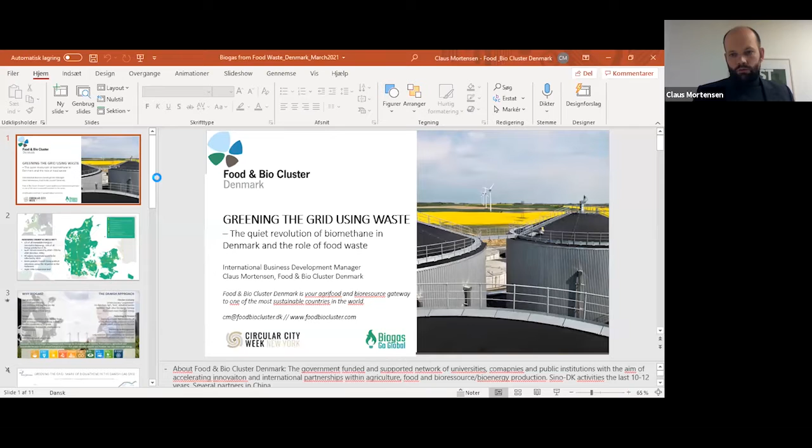Again, good morning, everyone. My name is Claus Mortensen. I'm a business developer in Food and Biocluster Denmark, which is the national cluster network within food and agriculture and bioresources. I've been working with biogas for the last around 9 to 10 years, and I'm here to basically tell the story about what has taken place the last 7 or 8 years in the Danish biogas sector.

This is a map of Denmark. We are in the northern part of Europe. We are highly intensive agricultural land. We produce three times the food that we consume, and we are highly dependent on having environmental solutions for this intensive and sustainable agricultural production.

So we are also well known for our climate policies. We have a clear climate goal of becoming climate neutral by 2050. That also involves using food waste as a resource for biogas and fertilizer. I'll of course get back to that.

I think one key aspect here is that we in Denmark have a tradition of working together and we have a high level of trust, which means that universities, companies, and policymakers are working closely together in this small country.

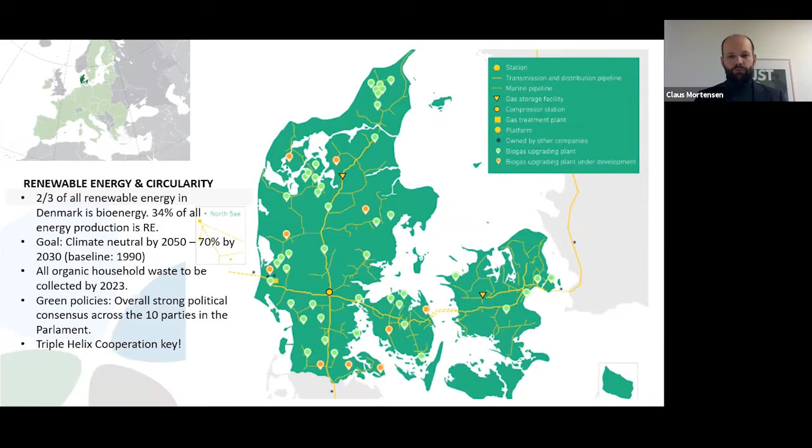So we are ourselves a gas producing nation. Many of you know this already, but I think biogas and biogas production solves a lot of different issues. It's not just an energy solution for producing renewable energy. It's also an agri-environmental solution for handling waste in different sectors.

So this is really a technology that has much more applications than just energy. I think that's a key thing I have to emphasize here.

And the Danish approach to that is that it is a circular economy. We're using waste. We're not using a high level of energy crops like you'll see in other European countries. And we see a high level of cooperation between different farmers, where we also have the contract between farmers and biogas plants, where you have this security of supply and also the security of getting rid of the digestate from the biogas plant.

But again, Denmark has chosen biogas production as a management strategy for organic waste streams from different sectors, because it plays on many of the different things we do in Denmark, also on agricultural, environment, and energy.

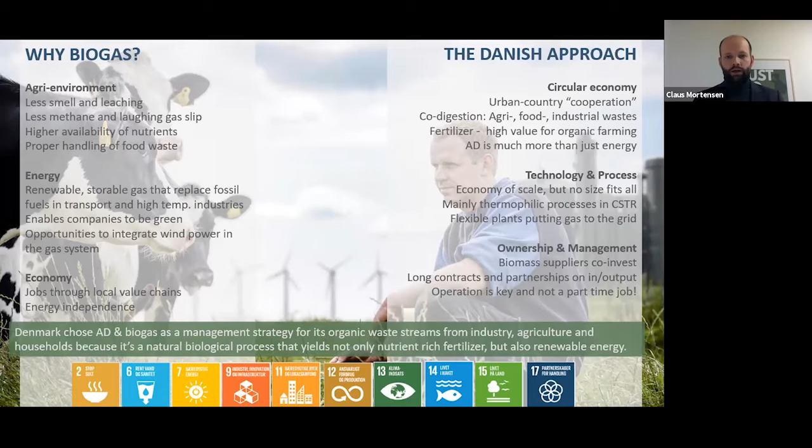So basically, we have around 170 biogas plants, and what we've seen the last 8-10 years is the rise of co-op plants. This means biogas plants hauling in 200,000 tons of biomass a year, and up to around, the biggest plants are close to 1 million tons.

As mentioned, the input we see here is a lot of animal slurry, a lot of different byproducts from slaughterhouses, from other organic fractions from the food industry. And then we see a specific increase of the use of household waste, but also straw.

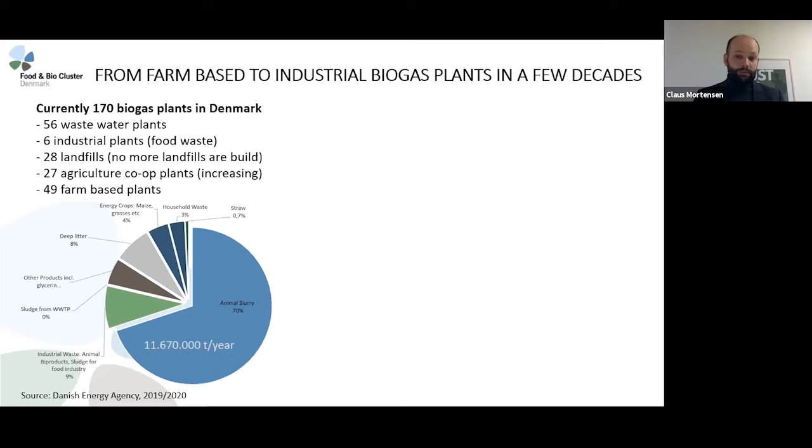It also plays a big role as input in Danish biogas plants. This is the rapid development and biogas boom, some would say, that we've seen since 2014.

We expect by 2023 that around 30% of the gas in the national gas grid will be green, and that again will go to 80% in 2030.

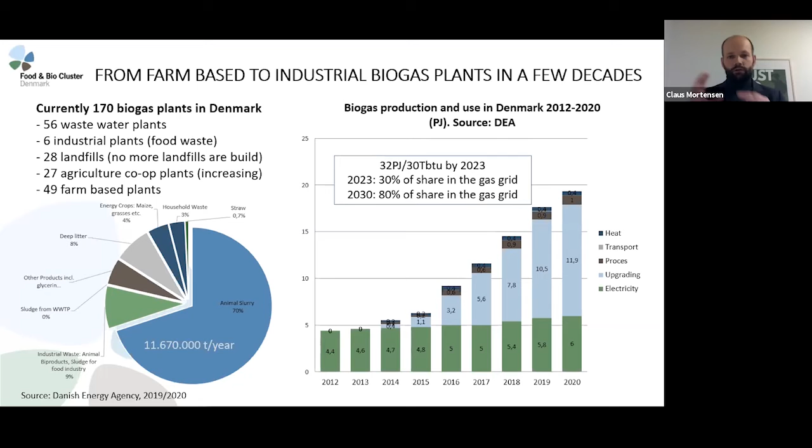Since 2014, almost all new plants are connected to the grid. This means that instead of creating a local energy source in the form of heat and electricity by taking a CHP plant at the biogas plant, you create a commodity which is traded in Europe. So you take a local product to a global product, almost.

As mentioned, there's a rise in the use of food waste from private kitchens, and this is just to share the value chain as we see it. It's not circular yet, but you have food collected in-house in apartments and houses in a small green bucket, then thrown in a bin which is collected by the waste utility, the waste company. Then it goes for pre-treatment.

The majority of the food waste goes to a Gemidan-run plant. Here it's quite important to emphasize that the quality of the output from this pre-treatment plant, which is a pulp, needs to be of high quality. Farmers eventually don't want metals, glasses, and all the inorganics on their fields. So in order to see food waste as a key for both nutrient management and use, but also energy production and job creation, it's important that the quality is at a high standard.

As you know, there are different products coming out of a biogas plant. You have the methane, which is the biogas, that can be upgraded to methane quality, biomethane, going to the grid. That solves some issues in sectors that you can't really electrify.

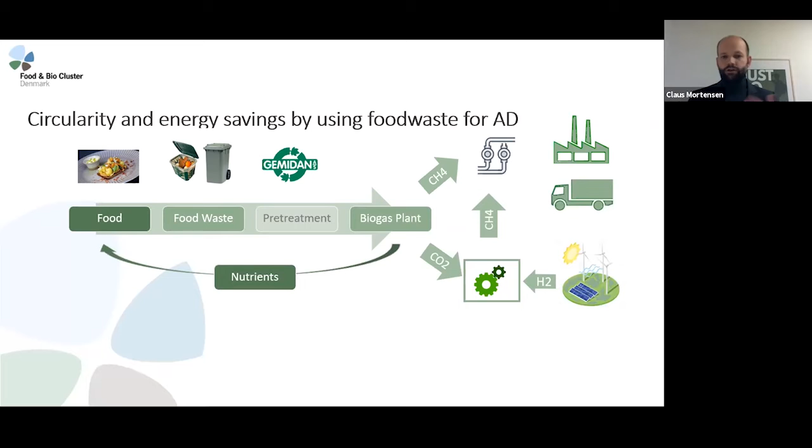And then this is what it's all about, basically nutrient management, which is key. Around 370,000 tons of food waste was used last year for biomethane production. Just considering the amount of nutrients in this fraction, even though it's a small fraction of the 11.5 million tons of biomass we use for producing biogas, this actually replaces...

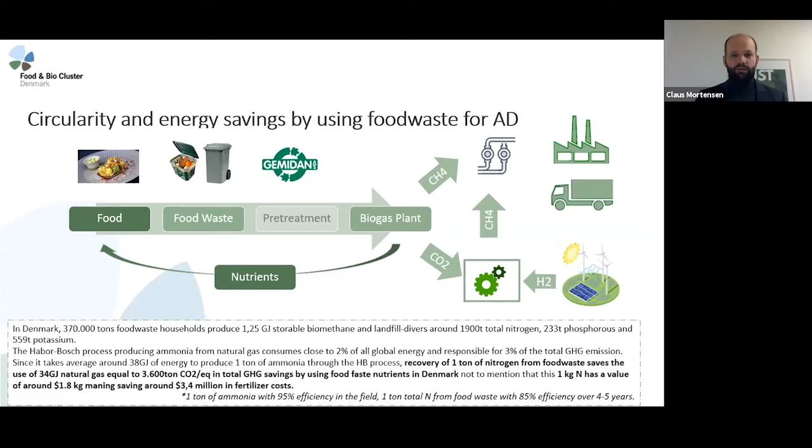ammonia produced on factories through the Haber-Bosch process, which consumes around 2% of all energy used around the world. I think that's key, that using biogas and food waste through biogas - food waste otherwise being landfilled - to create a nutrient product which can be used by the farmer in a safe and highly productive way. I think that's something we need to emphasize. This is basically a resource that needs to be captured and reused in a circular way.

Something we also have to remember is that biogas is the renewable energy creating the most jobs locally per $1 million invested.

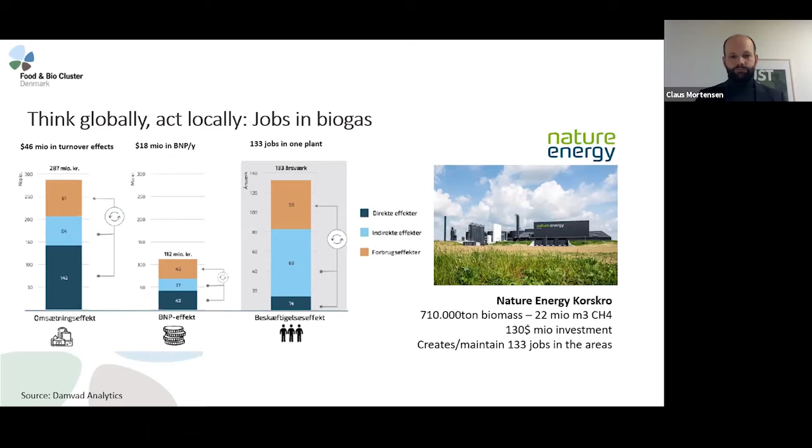Some of the work we do in food and biogas in Denmark is related to innovation and R&D, and we are happy to work with any US stakeholders on that and share our experience from Denmark. One of the projects we participate in at the European Union level is this ValueWaste project - again, what kind of products can come out of a biogas plant?

For instance, the methane can be used to produce protein for feed, or even in the future, food.

The digestate, we're looking into using that for insect production, again to raise the quality, but also the value of digestate for insect production, which can be used again as a feed for livestock production, which in Denmark are highly dependent on import of soy from South America.

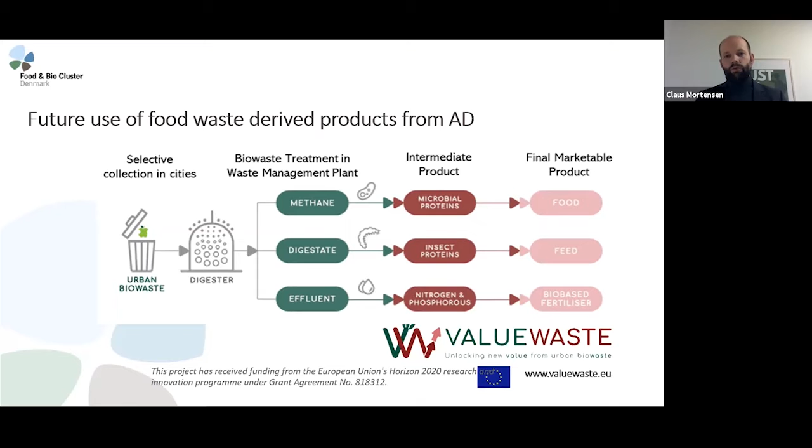The effluent, again, can be used into different fractions of fertilizer. We see some of the developments in Denmark saying that the fertilizer is now being customized, tailor-made for specific crops with the right NPK levels. That's some of the innovation we see in Denmark as well.

That's some of the things we would like to share with you if you're interested. We've done a report here on biogas production in Denmark, 50 pages on policy, on R&D, and on commercial elements. So I'll be happy to share it.

There's also a link here. One of the things we touch upon is the power to X stuff, using hydrogen from solar power or wind, and connecting that to the CO2. There's a lot of R&D stuff going on in Denmark on that topic.

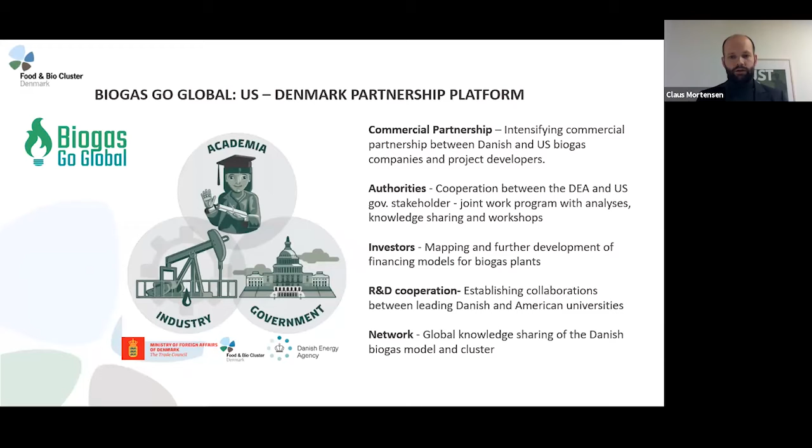Again, we work closely with Chris and Cecilia out of the Danish Foreign Ministry in Washington. There are your contacts in the US, but if you have any questions, just feel free to raise them. Basically, we're happy to take any inquiry.

And then the last thing, we are doing another webinar on the 5th of May, where we talk about this economy of scale in biogas production, which is quite also an important aspect to remember, is that by getting larger plants, you get the production price of biomethane down by economy of scale. So that's some of the stuff we'd like to share, and sign up to Cecilia in the email here.

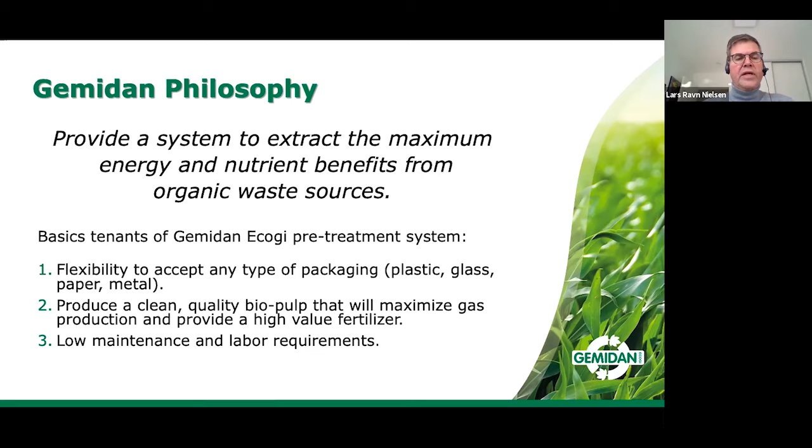Then we want to produce a clean quality biopulp that will maximize the gas production and will provide a high value fertilizer. And then we have a system with low maintenance and labor requirements.

If we are looking at a standard system, we have a feed hopper where you load the waste in, either with a front-end loader or an automatic crane system. From the feed hopper, it goes with a transport screw up to what we call the pulper, and in the pulper we add water to the waste.

Inside the pulper, the waste will rotate, and due to the centrifugal forces inside the pulper, the packaging will be opened so we get access to the food waste inside.

Then the food waste will be dissolved in the water during the pulping process. This is a batch production, and in each batch we have approximately 2.5 tons. When the pulping time is finished, a valve in the bottom of the pulper will open and the whole batch will go down to the separator.

In the separator, there is a big plate with a lot of small holes where all the fluid passes - that means all the organic stuff. All the inorganics will stay in front of the plate, and that's the way we separate our inorganics from the organics.

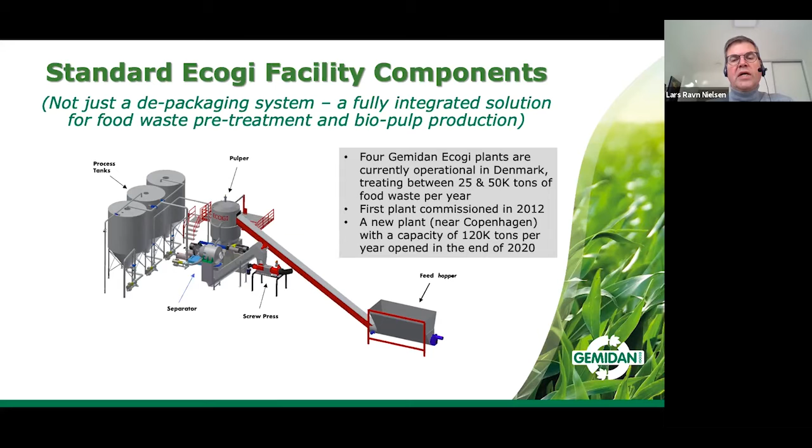In Denmark, we currently have four plants in operation. The first one is from 2012, and the last one just opened by the end of last year. This plant is receiving the food waste from the Copenhagen area. This new plant has 2 lines, so the yearly capacity is approximately 120,000 tons per year.

If we look at the system, we have a capacity of 10 to 13 tons of waste per hour, which means 250 tons per day if you run 24 hours. If you have more waste than that, we can put in additional lines to do a higher volume.

The dry matter content in the biopulp is adjustable, and we can adjust it in the range of 10 to 20%. If our system is placed just next to the biogas plant, we will typically pump it at perhaps 10% or more.

If it's going to be transported with a truck, we normally have approximately 17% dry matter, because then it's very easy to pump and it's very fast to load and unload the trucks.

Due to the process, the particle sizes in the biopulp are very small, and that allows for an accelerated biogas production. The system is highly automated with low OPEX, and it's controlled by a SCADA system, which can be operated remotely from an iPad, for instance.

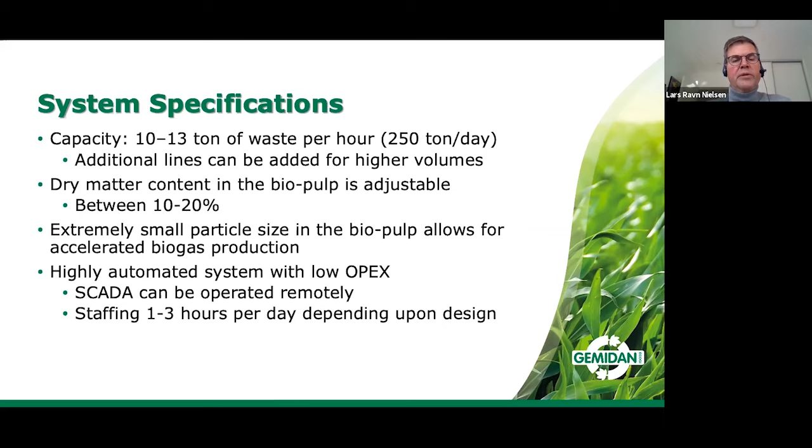When we are talking about flexibility, as I have mentioned before, our system is a combined depacking and pre-treatment system. During the pulping process, the packaging will be opened, allowing the organics to be dissolved into the liquid fraction. And we have what we call a low impact approach.

That means we try to keep all the inorganic parts in big pieces because then it's easier to remove. Some of our competitors start to chop the waste into small pieces in the process, and that means if you have a plastic bag and cut it into 100 pieces, you need very big efforts to find all those 100 pieces and remove them.

Our system will typically open the bag so it contains only 3 or 4 pieces, making it easier to remove them, which means we have a very clean pulp that we supply. All this means the system is able to treat and properly manage food waste from residential, commercial, institutional, and industrial streams.

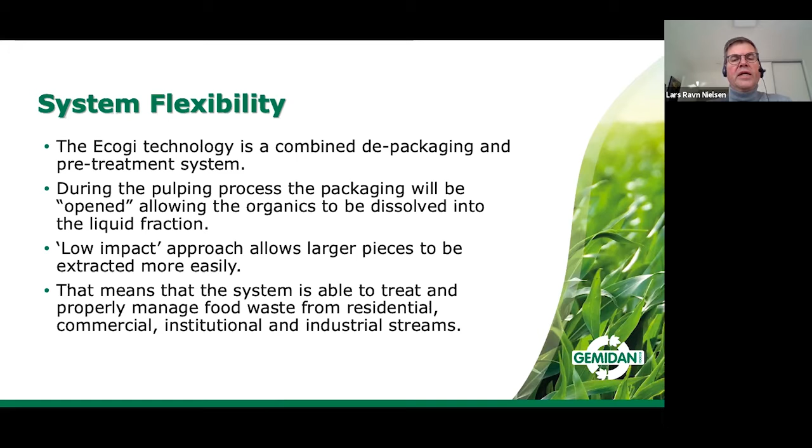Here you can see some examples of the waste we treat in our system. On the left-hand side, there's some cheese in metal cans, and we also have some beers in glasses. Even though I've worked with this system for 5 years, I'm still a little surprised that when you put a metal can in the system, the can will be opened and the food waste inside will come out and be dissolved in water.

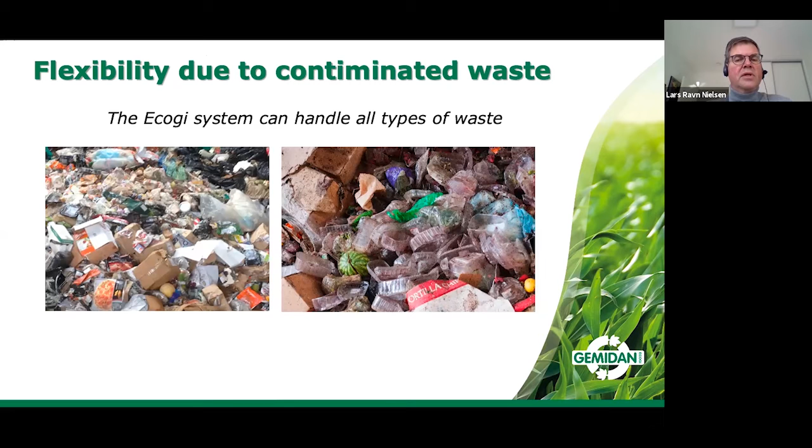And here you can also see some contaminated waste that we receive. As you can see in these pictures, there is also a lot of non-organic or inorganic stuff in the waste.

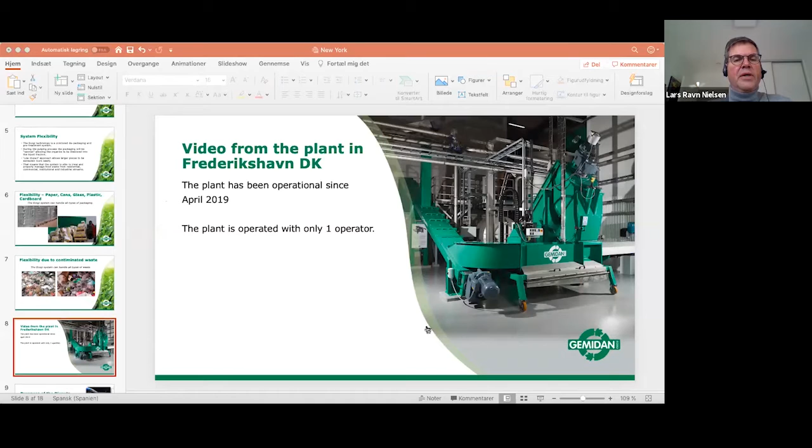Now we will show you a video from our plant in Frederikshavn in Denmark, operational since 2019. At this plant, only one employee does all the work there. Even though it seems very clean everywhere in the video, this was recorded 6 months after opening, and after 2 years now, the factory still has the same clean look if you visit.

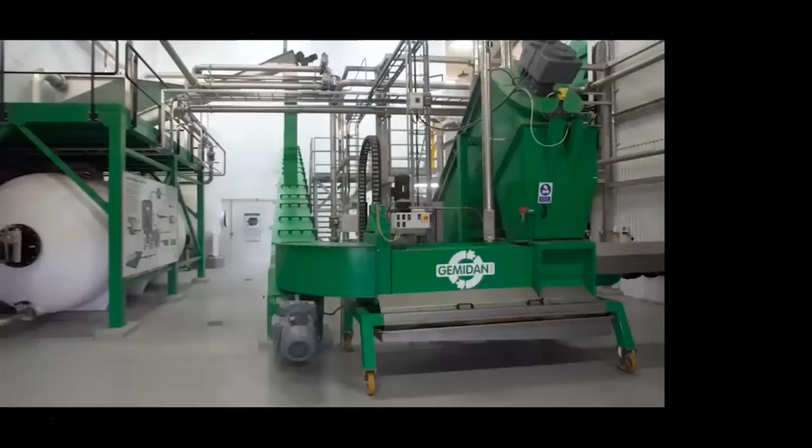Gemidan Ecogi is a revolutionary technology capable of mechanically converting organic waste into a biopulp that can be used for energy and fertilizer.

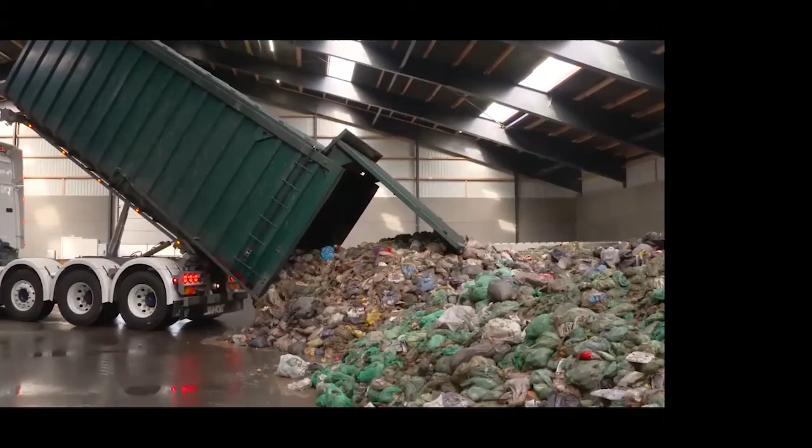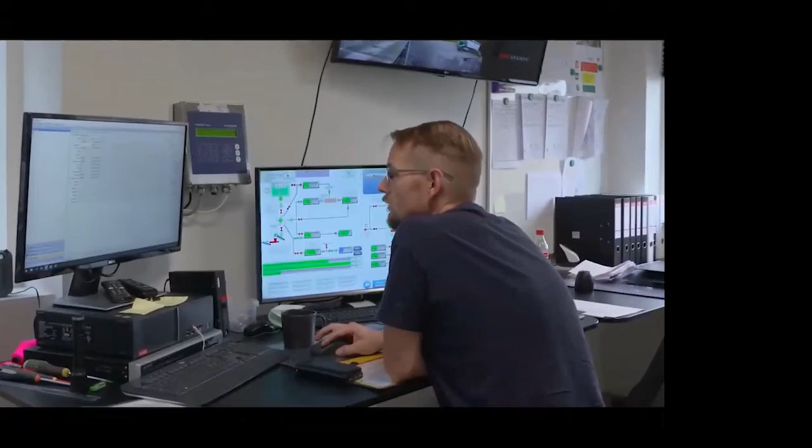The system is designed to efficiently receive, process, and get rid of organic waste. First, the lorries cross the weighbridge, where all accessible data about the waste is recorded and stored as documentation as required by law. The system is designed to efficiently handle all types of lorries.

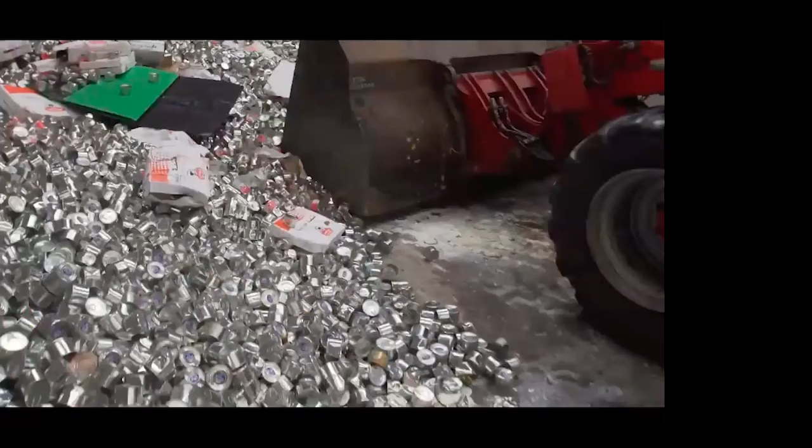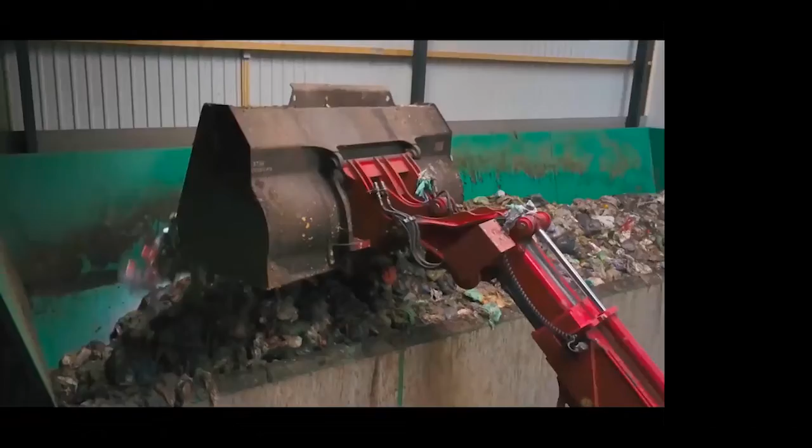The delivered waste is either tipped into the receiving pit or directly into the receiving hall. The system and technology are designed to handle waste enclosed in all types of packaging: plastic, metal, glass, and cardboard.

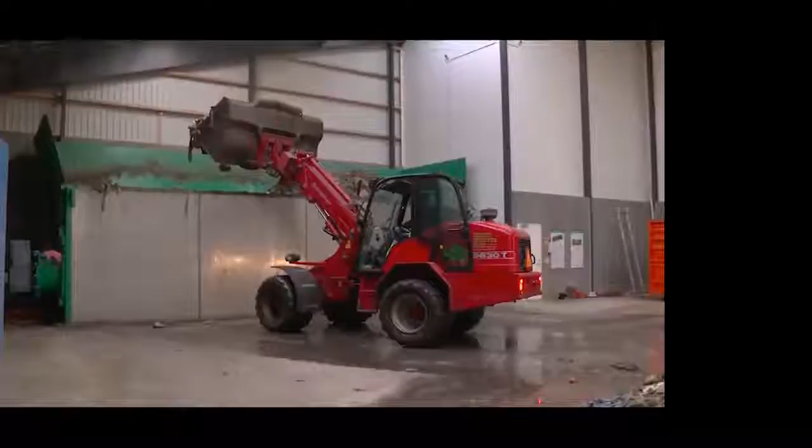After this, the process of handling the packaged organic waste begins. The waste is loaded into a feed hopper by a front-end loader. In this system, the feed hopper is capable of operating for about 4 hours, but it can be adapted as required.

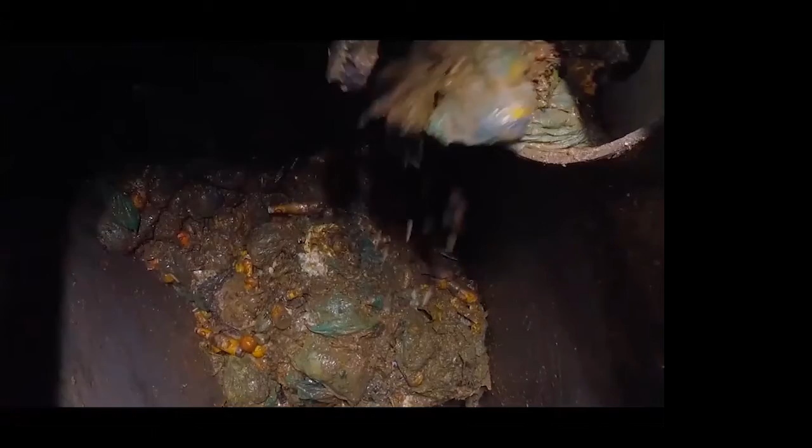Once the feed hopper is filled, the automatic process begins, in which the packaged organic waste is conveyed up into a small feed hopper by a screw conveyor. This process helps enhance efficiency because the feed hopper fills the pulper very quickly.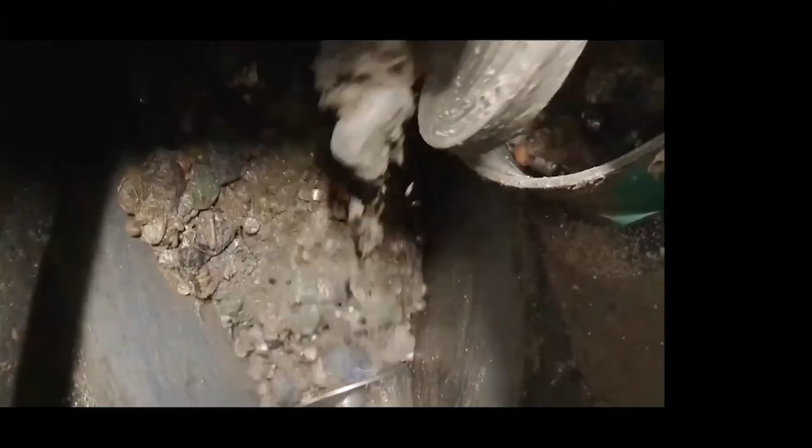The pulper is a large rotating centrifuge in which waste is mixed with water, quickly dissolving the mixture into a mash-like substance called biopulp.

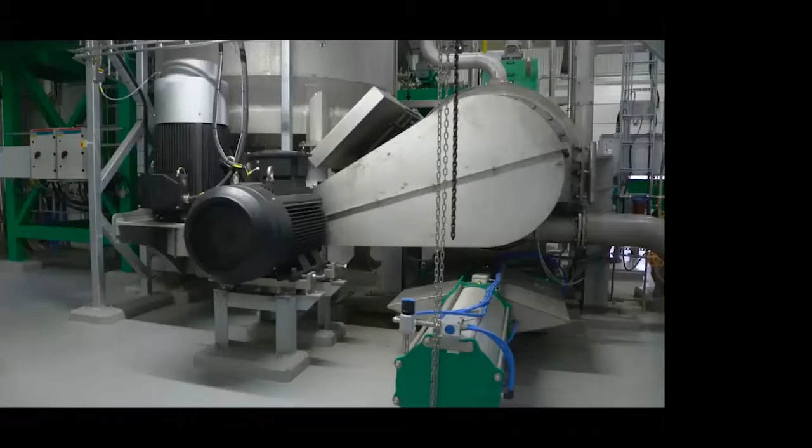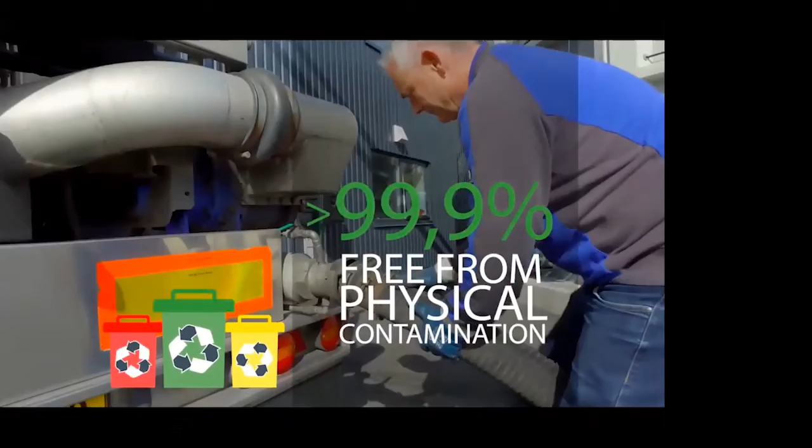From here, the biopulp is sent to a separator, which separates the inorganic material from the organic material, sending a more than 99.9% pure organic pulp to a storage tank and onto tankers destined for biogas plants.

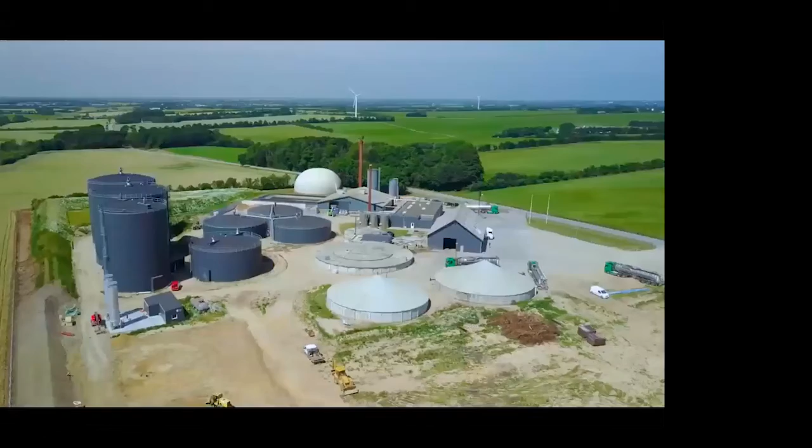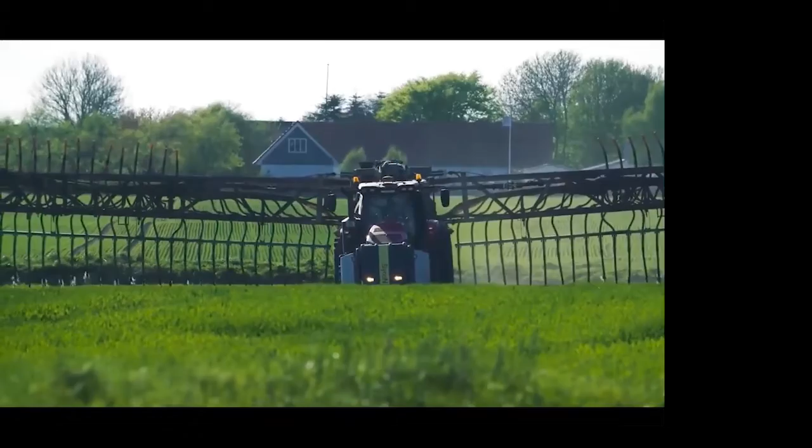The plants extract the biogas from the biopulp as an eco-friendly, sustainable alternative to fossil fuels. The degassed residual product from the Ecogi system is spread as biofertilizer on farmland, thereby contributing to the circular economy.

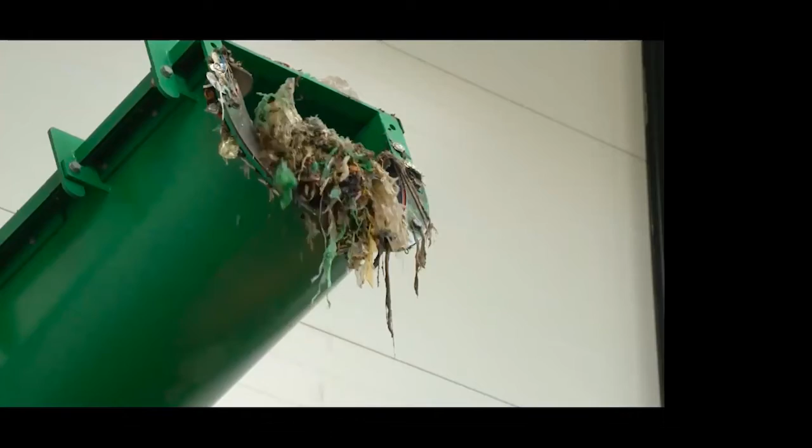Back at the facility, all the separated inorganic materials have been sorted out. The dry materials are recycled wherever possible. The inorganic material left over can be sent to an incineration plant, which converts your waste and mine into district heating, benefiting all of us once more.

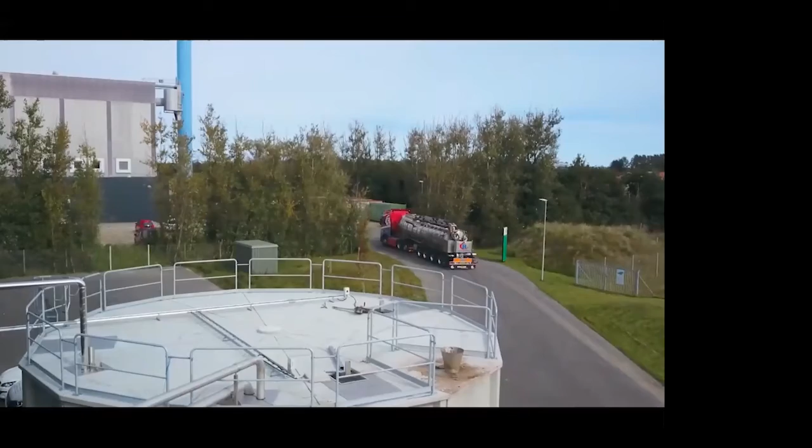Help us to be kind to our environment. It's simply common sense, and green at that.

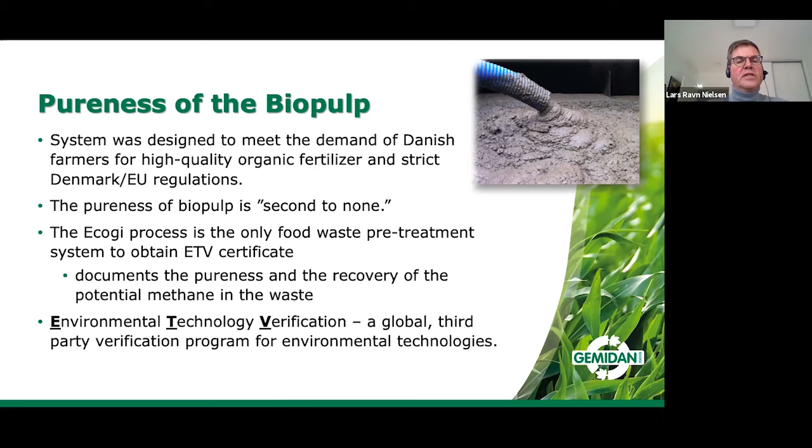The Ecogi system process is the only food waste pre-treatment system that has obtained an ETV certificate. That means a third-party organization can come, take samples, and then give you a certificate. This certificate documents the pureness and the recovery of the potential methane in the waste.

Here you can see some figures from this certificate. In the first line, you can see they checked some biopulp with 17% dry matter and tested it for all impurities, and the result is 99.96% of the pulp is organic.

And if you check only for plastic, due to the very low weight of plastic, we have an even higher pureness of 99.996%.

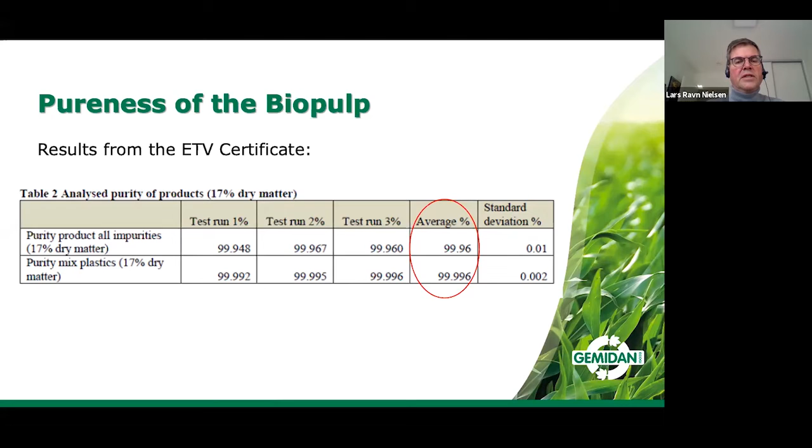In the future, we expect stricter regulations for use of digestate as a fertilizer, giving even higher demands on the purity of the biopulp. In Denmark, we don't only measure the weight of the plastic, but also the covered area, meaning the volume of it. Ecogi is prepared to fulfill those new regulatory demands.

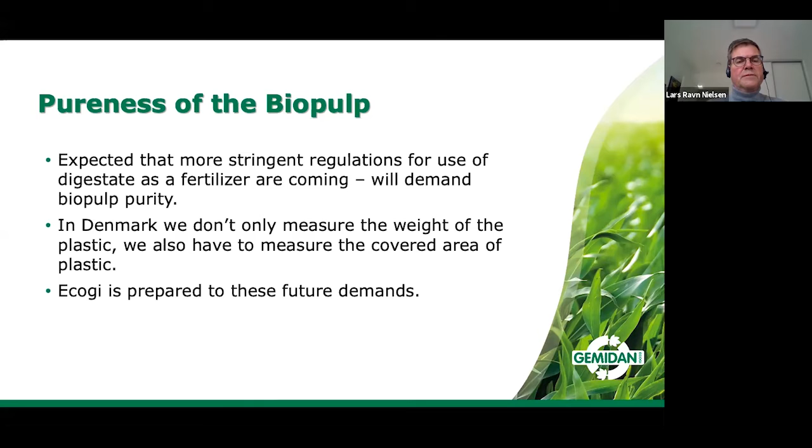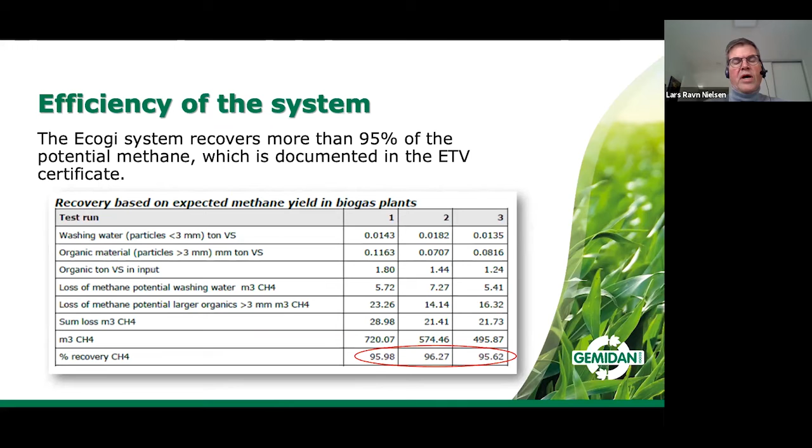We also make our own declaration of the pulp from each of our plants. In the certificate, you can also see they have measured how much of the potential methane in the waste you recover in the system. Here you can see that we recover around 95% of all the potential methane in the waste.

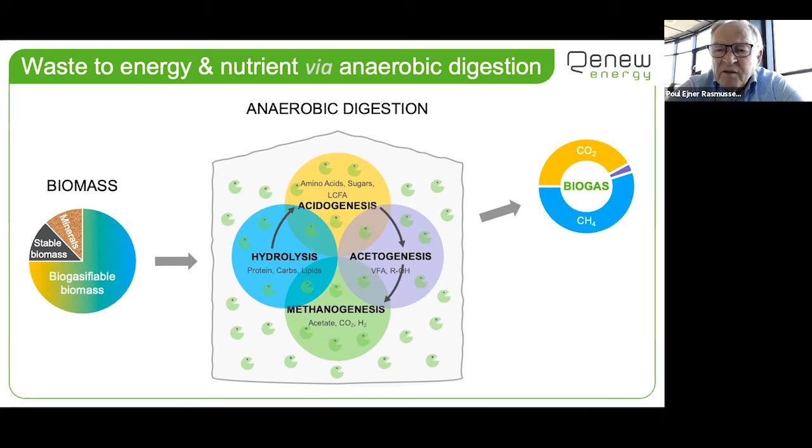That's why we are always looking at the biomass type and analysis of the content, and then we can do a mass balance. The mass balance will tell us how the process will work, and that will give us the design parameters for a biogas plant. The output will be biogas, and there will be digestate to deal with.

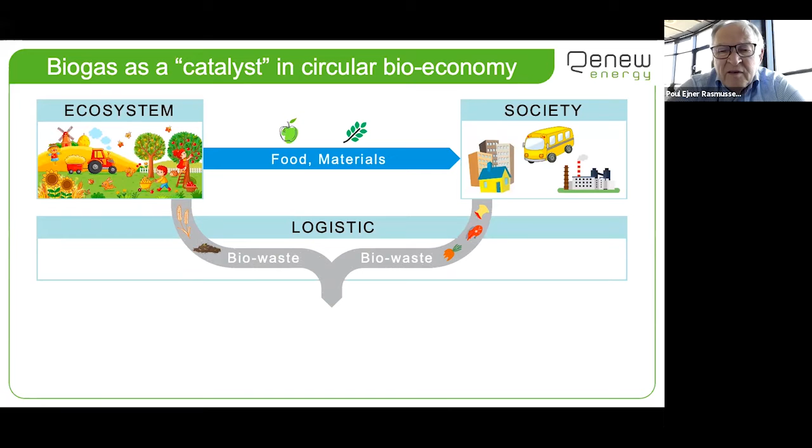We try to explain that the biogas system is a catalyst in circular bioeconomy. On our land side, we have our ecosystem where we are producing food materials, which goes into the city who are processing it, eating it, and at the end there will come bio-waste from both sides—bio-waste from the food industry and bio-waste from farms—and it can go into anaerobic digestion together. We call it co-generation, co-digestion.

Digestion will produce biogas, and it will produce nutrients which can go back to the farm. We can recover nutrients in a form which will be needed, or we can land apply it directly, which is common here in Denmark, but it's not always the case. We don't have land available, and then we need to do further processing. I will come back to this a little bit later.

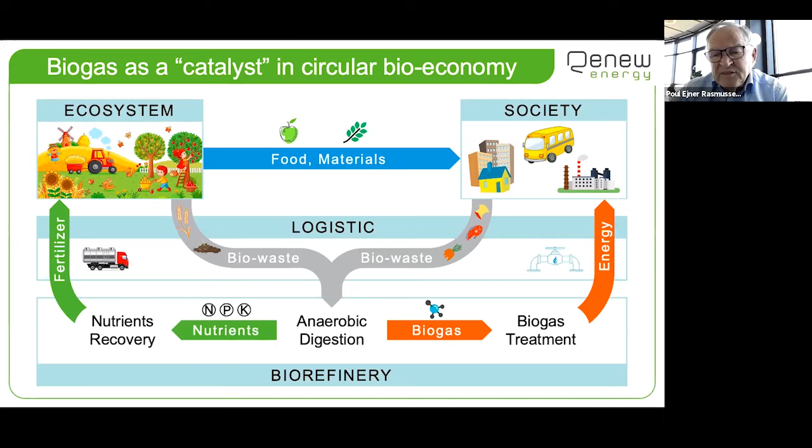Biogas can be treated and upgraded to be used either as biomethane, or it can be used to fuel gas engines to produce power and heat.

Bioeconomy or circular bioeconomy - I will try to say which kind of low-hanging fruits we can deal with. We have household organic waste, industrial organic waste, and agriculture waste. It's again a resource for producing energy and nutrients.

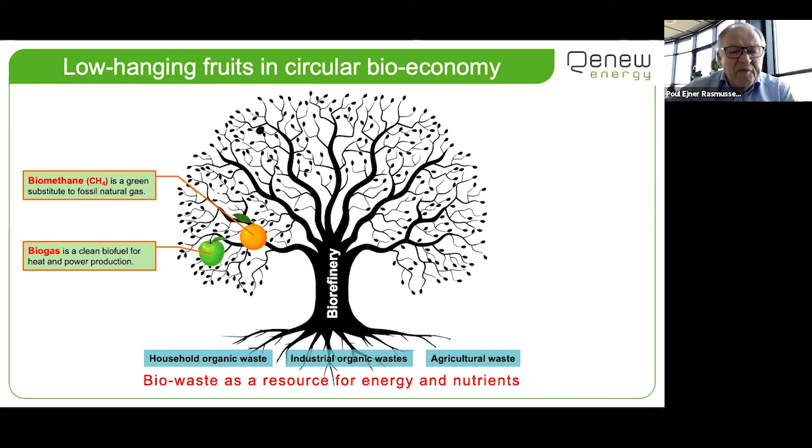We are producing biogas as a clean biofuel for heat and power production. We are producing biomethane as a green substitute for fossil natural gas. There was a question about the quality of biomethane - it's absolutely the same quality as natural gas, even cleaner, because it has no higher hydrocarbons, only methane.

It can be used just as natural gas. There are specific restrictions on how clean it should be - we need up to 98% methane, almost zero sulfur in, we will not accept any CO2 (only limited), and no acceptance of water in. Oxygen is also not accepted, so it should be less than 0.2% or something like that.

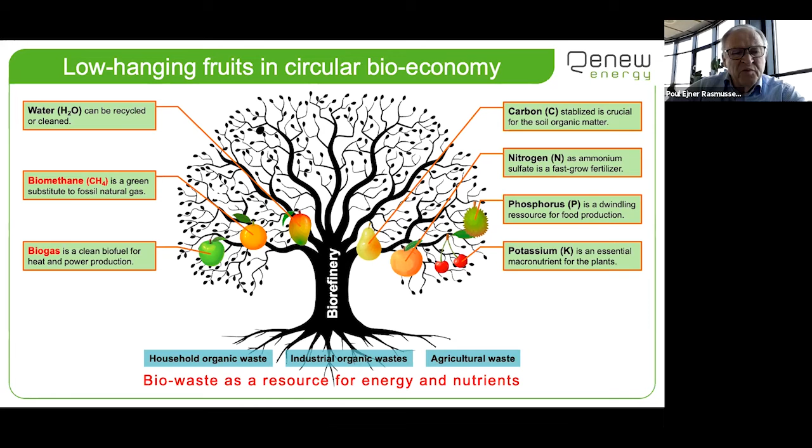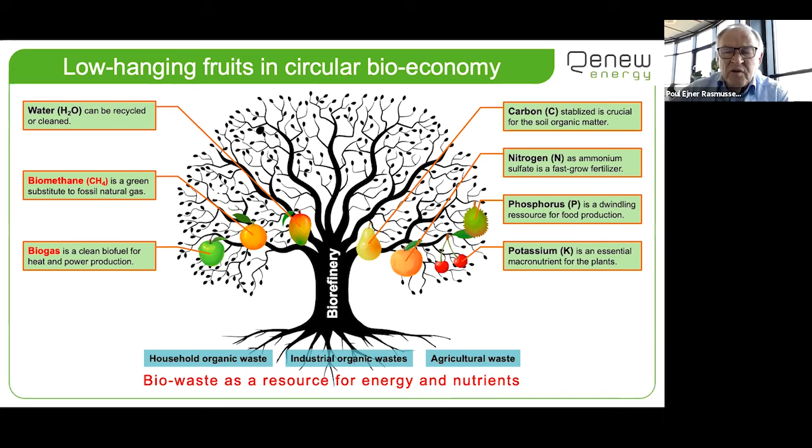Water can... and then we have the other side where we have the carbon. We have nitrogen, which is useful as a fast-growing fertilizer. We have phosphorus, and of course potassium - all the ingredients we need for successful farming.

A very simple system here is where it all started with biogas. It was slurry from farms, preheated up to a temperature either mesophilic at 37°C or thermophilic at 52°C. It was mixed here - most importantly is that we have good mixing and good temperature control, then we are producing biogas.

Biogas will contain sulfur, hydrogen sulfide. It needs to be cleaned in order not to destroy the gas engine when we're producing power and heat. And then there will be a digestate which can go to storage and then for land application.

Then we can do it a little more sophisticated, as we are very often dealing with co-digestion. So it's not only farm waste, it can be some other type of organic material, solids. We need to have pre-mixing in order to have a condition for the feed going into digestion, which are homogeneous, pumpable, and mixable.

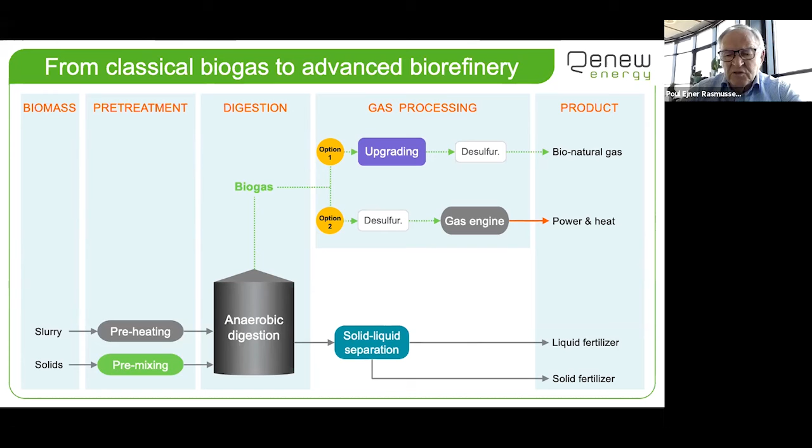Per tradition in Denmark, we have delivered all degassed material, or so-called digestate, back to land as a liquid fertilizer for land application. We can also do a mechanical separation here in order to have an even more liquid fraction, and we can have a solid fraction also as a fertilizer.

We also need what we call sanitation, because according to EU rules, we need to secure that no pathogen bacteria will pass through the system. So by law we need to have a pre-treatment for 1 hour at 70 degrees C in order to be sure that it's absolutely pathogen-free, which goes in here and further on to the land.

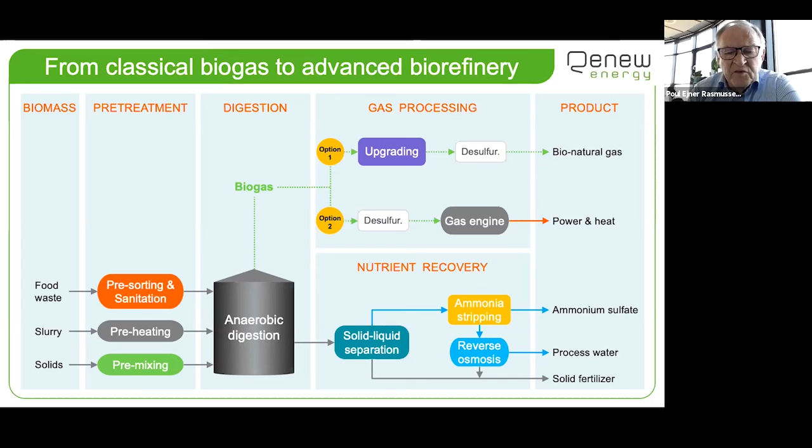And that's what we actually have built in Trenton, New Jersey. In Trenton, there is a site where our system is built in. It's treating 300 to 400 tons of food waste per day, with a power production of 3 megawatts.

Construction started in 2018, and the first part was commissioned end of '19, but there has been continuously increased capacity for food waste, and we are almost there where it's working completely. It's placed next to a wastewater treatment plant, and the effluent after digestion has a quality which allows us to deliver it back to the wastewater treatment plant, with no land application needed.

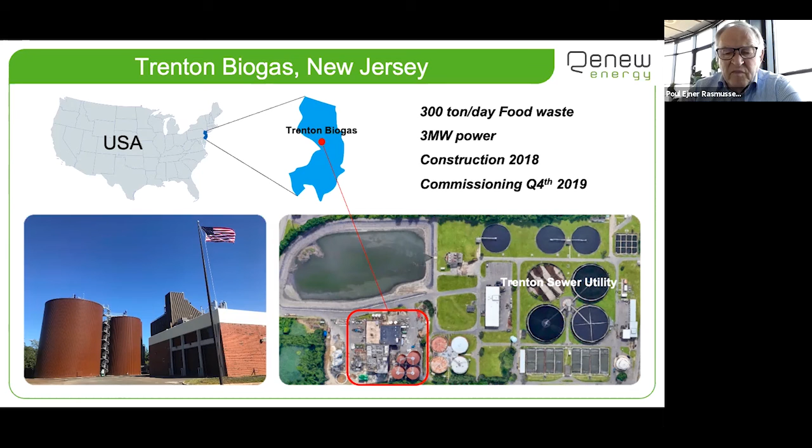So again, we have a pre-treatment, a depacking system, and there are additional industrial waste coming in to the digester. We are producing biogas. We have a desulfurization, a gas holder, gas engine, which produce heat and power. Then the digestate goes firstly into mechanical separation in a decanter centrifuge, where we are producing biosolids, and we have a liquid which is processed in ammonia stripping, taking ammonia out as ammonium sulfate, and we have effluent delivered back to the wastewater treatment plant.

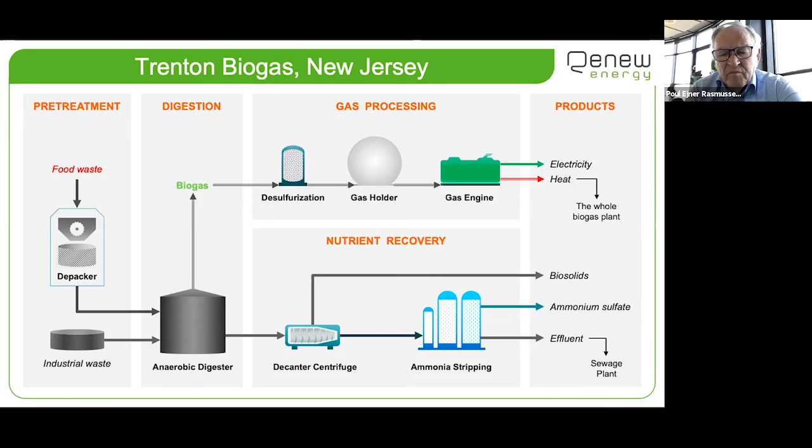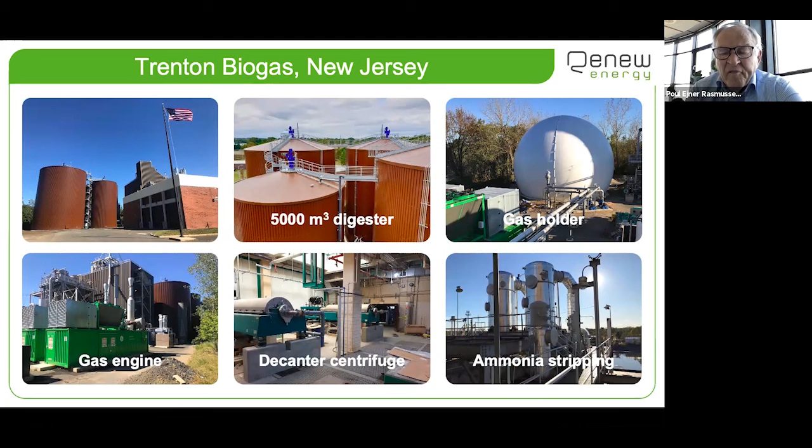There are pictures about the plant. There are 3 digesters, each of them 5,000 cubic meters. There's a decanter centrifuge, gas holder, and ammonia stripper.

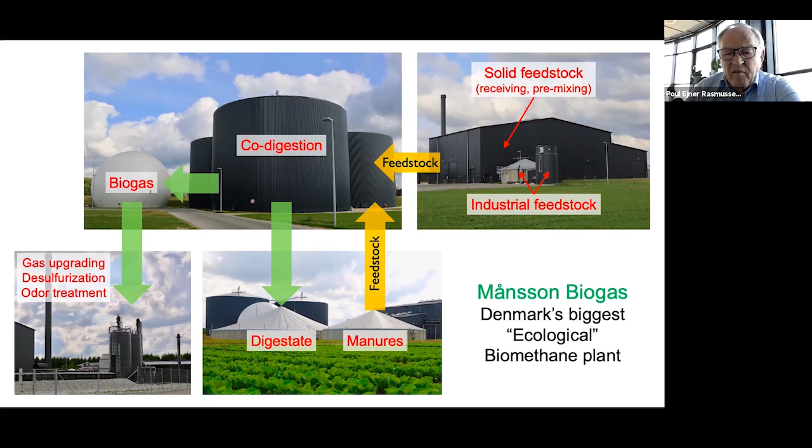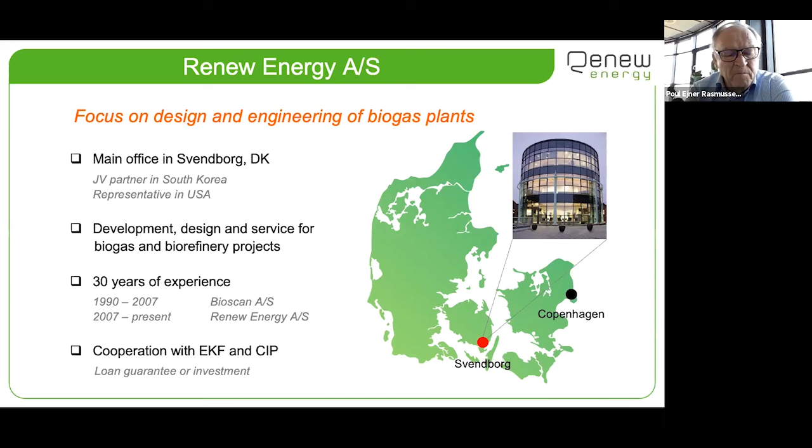Yes, we have our office in Denmark. We are doing development, design, and service for biogas and biorefinery projects. We have a couple of projects in the US, one in Michigan built 9 years ago. We have renewable energy, Trenton Biogas, which has been in process for a couple of years, and then we have a few other projects coming up right now.